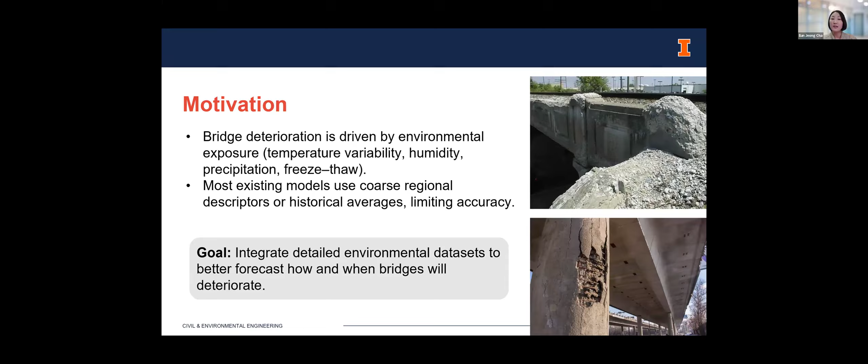So, quick overview of today's talk. We streamlined this according to our modeling process as well.

So we started with the data. I'm going to go over what data we have used and what kind of processing of the data we have done, and the initial model that we have developed, and some challenges we have and how we actually tackle them, and also the model performance of this initial model.

And then we also have improved this model. We are going to talk about the model improvement, about the data expansion, and the variable selection techniques that we have used.

And this improved model's performance. I'm going to also show you a brief demonstration of the model application in terms of predicting the bridge condition with variable environmental scenarios.

And lastly, I'm going to show you a little bit of a comparison between the precast versus the CIP bridges, CIP concrete bridges performance.

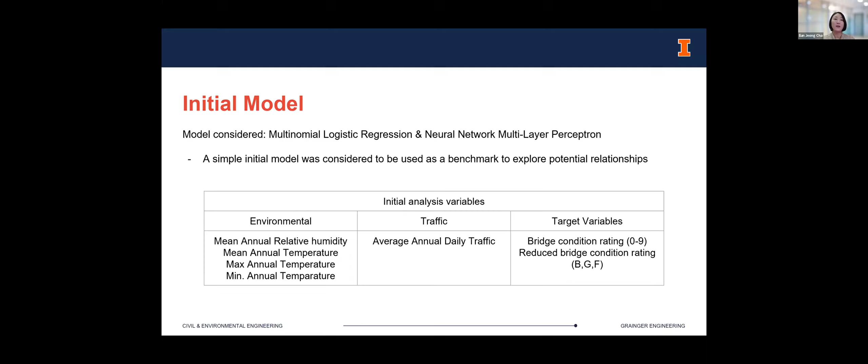So for the multinomial logistic regression, it calculates the probability of a bridge belonging to a specific condition class. We use two different classes. First one is good, fair, poor, just a 3-class system. And the second one is the structural evaluation classes, that 9-class thing from 0 to 9.

So those two are separately used, which we have just to generate a separated model for each individual of them. So with utilizing multinomial logistic regression, what we can get is a probability that the bridge specifically belongs to a certain class.

With utilizing x's as the parameters. Those are all the predictors that we use, which are coming from structural parameter, traffic parameter, and environmental parameters.

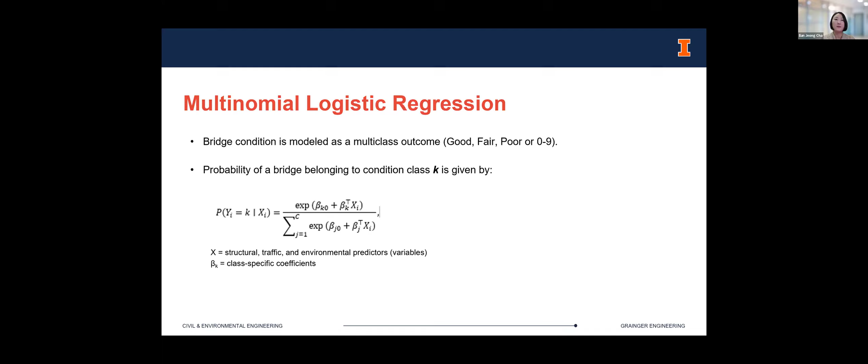So while we are modeling, this modeling is something like design. It's not just done in one step. We generate the model, and then we test the performance and accuracy of this model. There are lots of issues that we have found.

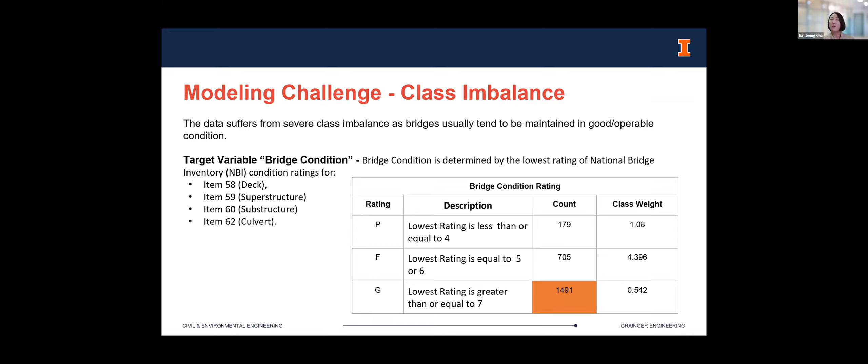The one main cause of the issue we found is class imbalance in the data set. As we can expect, there are not that many low rating, poor performance bridges out there. In the table for bridge condition rating - poor, fair, good - the majority of bridges belong to the good rating, and we don't have much representation for the poor rating. So there is definitely data imbalance, and that causes some issues in terms of performance of the modeling.

To address this class imbalance, we considered different techniques. First is oversampling of minority classes based upon our data - when training our model, we oversample minority classes. The second methodology is undersampling of majority class; they work together, randomly reducing majority class samples to prevent model bias. The third methodology we considered is assigning class weights.

In this methodology, we penalize misclassification of minority classes more heavily during training. In our case, when we evaluated assigning class weights, it actually worked the best to improve the performance of our model.

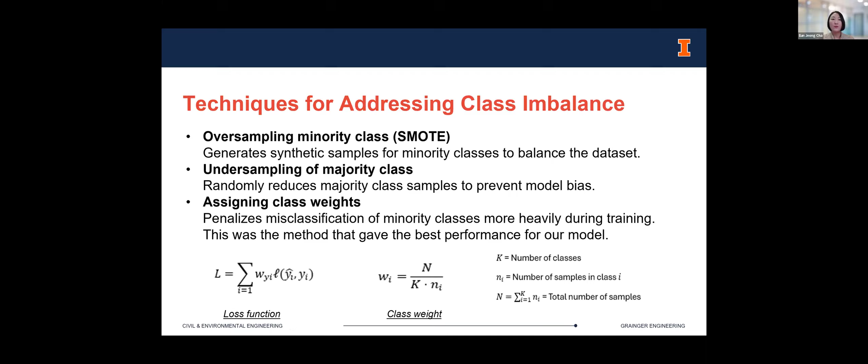Using this technique, we chose this class weight for training our initial model, using a 7:3 training to testing data split. Using both logistic regression and neural network methodologies, we got pretty similar results. For the 3-class rating - good, fair, poor - we got accuracy around 55%. Using the 9-class rating, we got accuracy around 37%.

Obviously we are not happy with this result, so we had to find additional techniques to improve the performance of the model.

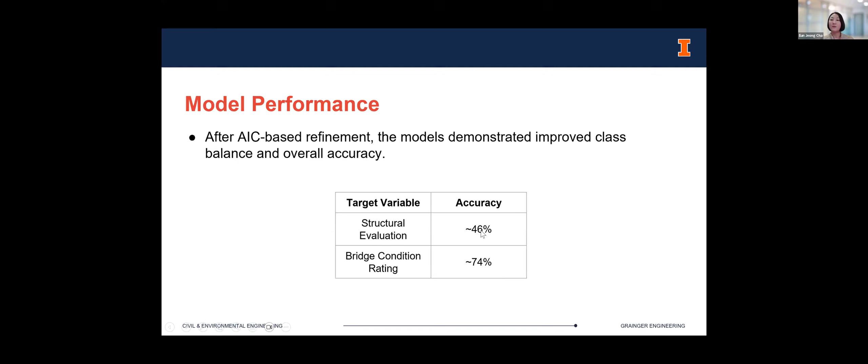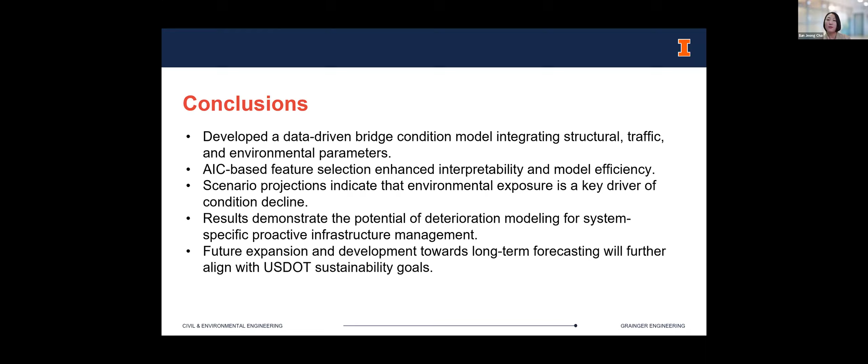And then all these bridge condition models can be used for future expansion and development toward long-term forecasting, the long-term management of those infrastructure systems. So that's all I have today. And if you have any questions, please ask now or send me an email.

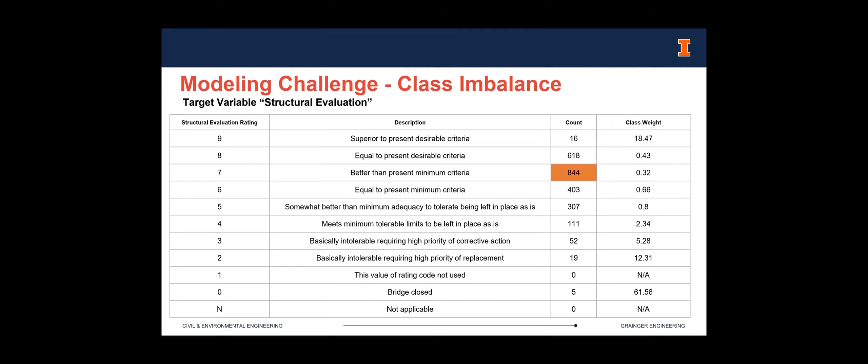Yeah, so you said the 5 variables were extended to 37 when you did the dataset expansion, and then when you applied AIC, those 37 variables were reduced to 10, and then it increased your accuracy. So is it possible, how did you break this down? How did you expand this dataset to 37? Did you break down the primary variables into 37 categories, or are those new variables that you inserted? Right, so yeah, good, thank you so much.

So for the 37 variables, we expanded from what we had earlier, and we performed a more in-depth literature review to come up with anything that could really be related to the bridge condition. So whatever had been named at least one time in any literature, we included it. Obviously, the names of those parameters from the dataset may not match the ones from existing literature. We just did a wide search, expanded it first, and obviously if you use too many variables, it doesn't always help train the model. So that's why we needed to identify only the key variables, and whenever there was a redundant variable, we let go of it. That's how the AIC works. But in the earlier part, we just tried to identify everything we could find from the literature review.

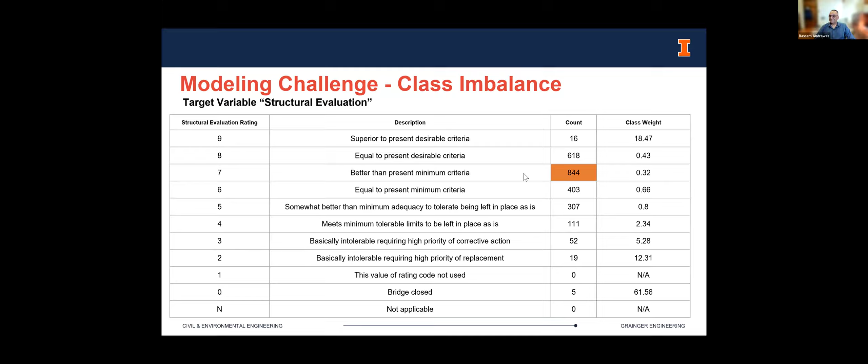Okay, thank you so much. Last chance for any questions, Dr. Cha? All right, well, thank you so much. Thank you, Dr. Cha. Thank you.

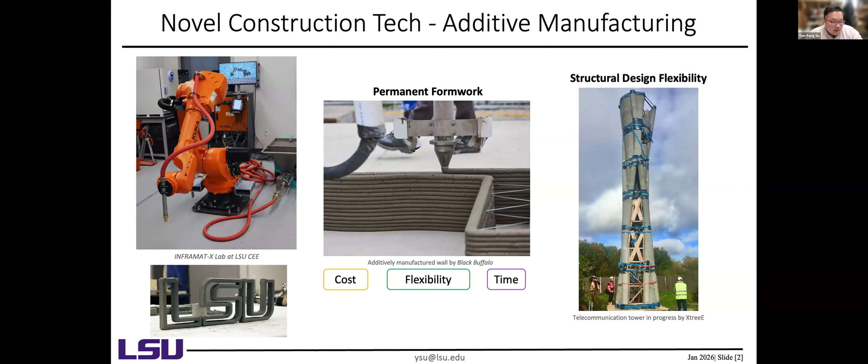Yes, thank you very much for the invitation. Today I want to talk about the work done with my student Kailula Touch on 3D printed smart permanent concrete formwork for precast structure members and components. As we all know, 3D printing nowadays is a novel and promising technology because it can reduce cost, enable a lot of flexibility in design, and might be able to reduce time.

We came up with the idea that one of the most promising fields for 3D printing might be using multi-material approaches to build multi-material structures. Previously this was mostly for polymers, and we thought, why not move to concrete structures or precast concrete structures to enable multifunctionality. Within this multifunctionality, one thing that really caught our eyes is the ability to sense or monitor the structure's own condition.

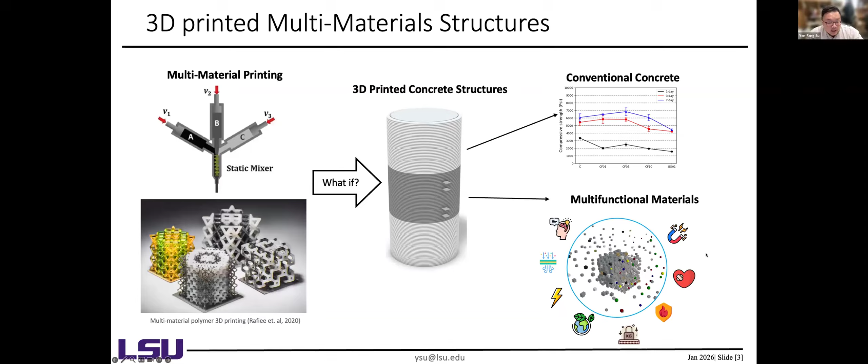The reason we're really into that is because current transportation infrastructure is not in good shape, and if we want to build new infrastructure or do repairs, it's better to embed structural health monitoring functionality. Traditionally, for structural health monitoring, we introduce a lot of different varieties of sensors.

However, the cost is not cheap, especially from the sensors themselves, different sensors, and the maintenance is not cheap either. So we wondered, why not find a material that has intrinsic sensing property or performance built in.

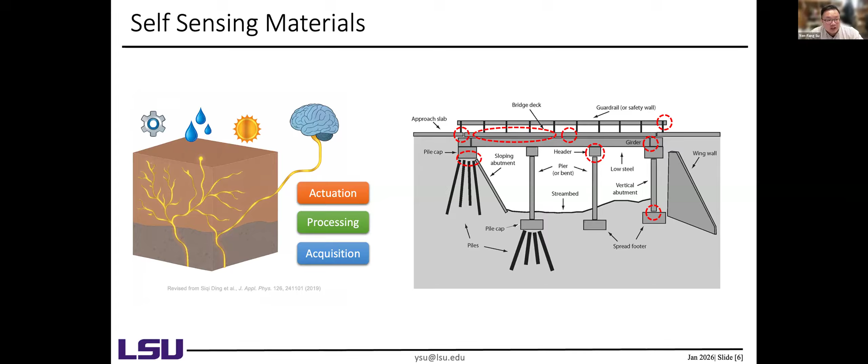That led us to study self-sensing cementitious material, or smart material. This smart concrete was proposed by Professor Chung, who is also in our center, from SUNY Buffalo, a few decades ago. We really appreciate her proposing this idea, and we got into this material trying to understand if it can really be implemented in civil infrastructure at large scale, because this material can sense stress, humidity, or different changes in the internal structure. Since this material is not cheap, we're targeting embedding it in specific or critical areas of the structure.

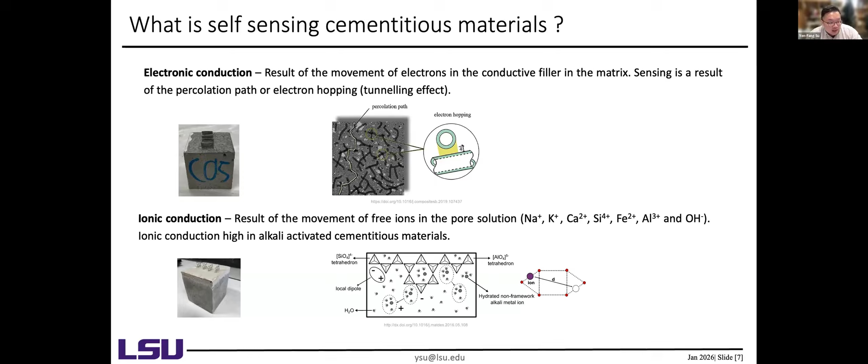Let me give a brief introduction to self-sensing cementitious material. Self-sensing basically works through two mechanisms: electronic conduction and ionic conduction. Electronic conduction is achieved by incorporating conductive filler into the cement matrix, from which we can obtain an electronic signal. Ionic conduction is based on the movement of free ions in the pore solution, intrinsically built into the cementitious material, specifically abundant in alkali activated material.

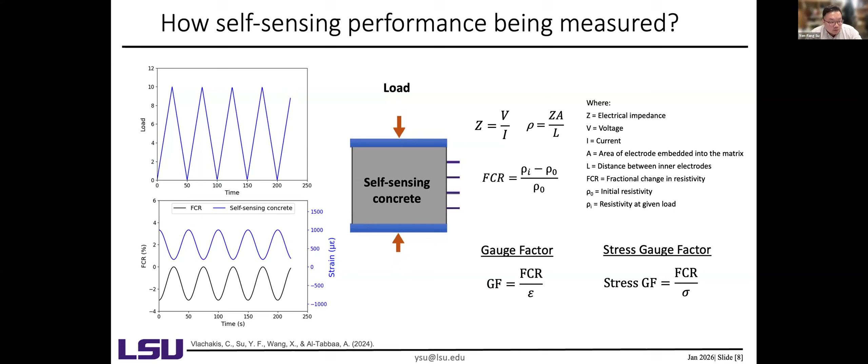So how can self-sensing performance be measured? Here's an animation we produced showing what happens if we apply a load to the material. We can measure the electrical signal by sending current through the material and obtaining the impedance or electrical signal, then convert that to the fractional change in resistivity. We further use this to calculate the strain gauge factor to compare with the strength or deflection. So it's basically like a strain gauge, but built into the material itself.

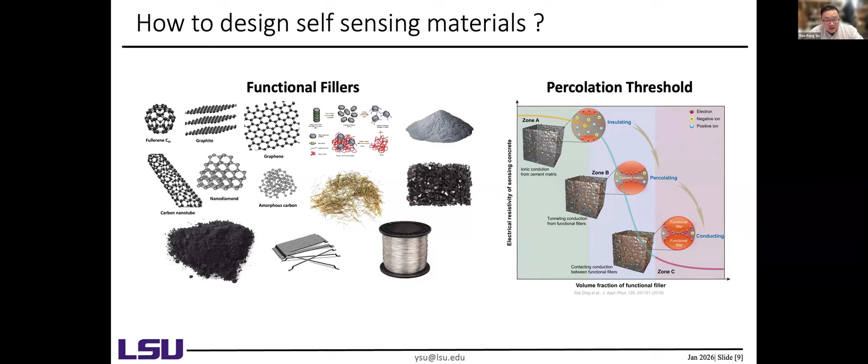But how do we design the self-sensing material? This material has already been developed, proposed and investigated for a few decades, but it's all been at small scale. So we wonder about the large scale. It's really critical to select the functional or conductive filler, and especially when selecting it, one thing we need to take care of is the percolation threshold - we cannot make the material too conductive, nor can we make it too insulating. We need to find a point in between.

So we conducted a really comprehensive literature review of around 100 journal papers from 2000 to 2024, collecting data to plot gauge factor versus strength. We classified these into concrete, pastes, mortar, and UHPC. We can see that some results, especially for concrete, mortar, and pastes, present really high gauge factors.

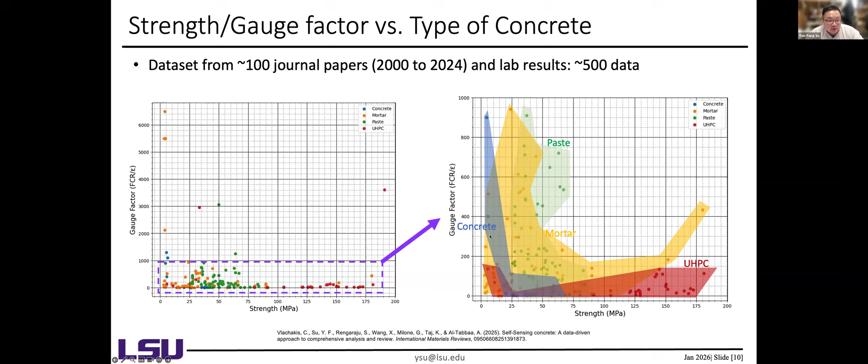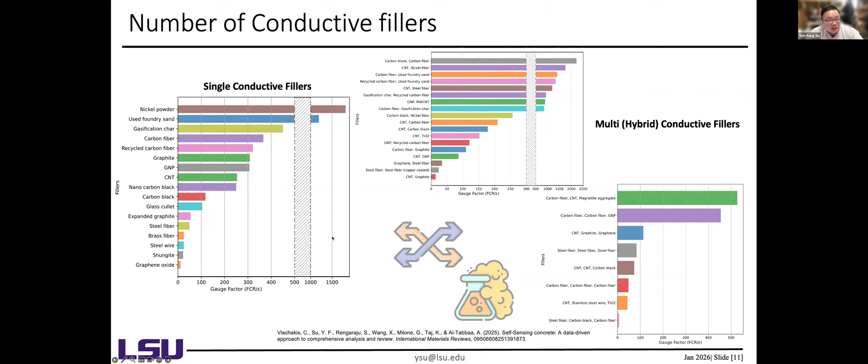In terms of conductive filler, we also noticed that people don't only use a single type - some use a hybrid of different conductive fillers together, and some of them get extremely high gauge factors. So we're trying to figure out what type of conductive filler we're going to use.

We also organized this data and found that conductive fillers can be classified into 0D, which is powder form, 1D which is fiber form, and 2D which is like a plate. We found that 1D and 2D seem to be better compared with 0D. So we collected materials for 0D, 1D, and 2D and tried to make the self-sensing concrete to see what results we could obtain.

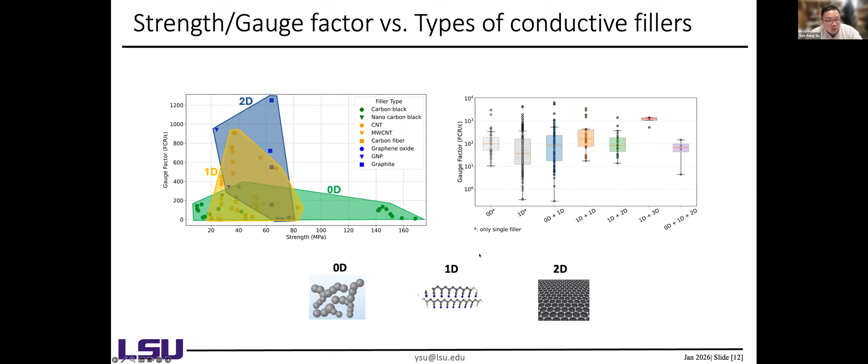So for 0D, 1D, 2D, we started from carbon-based materials. Carbon black is a 0D material in powder form, milled carbon fiber is a 1D material, and for the 2D material we got pristine graphene. We collaborated with different companies to source this material. This table shows the properties of different conductive fillers, including shape, density, and resistivity - the differences are large.

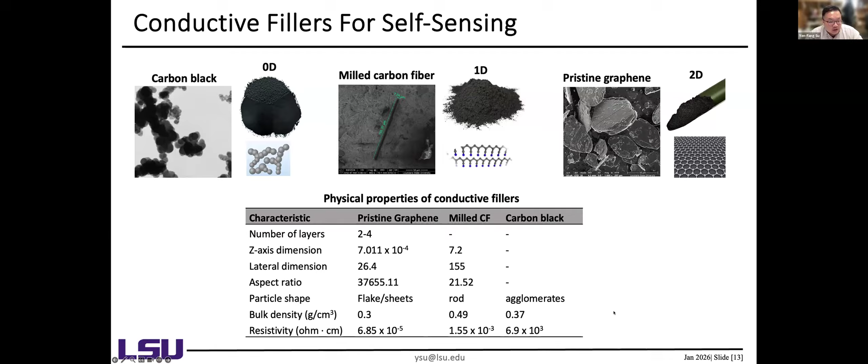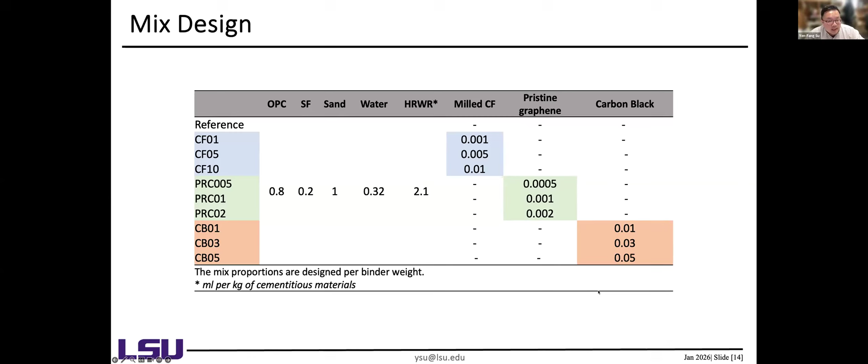So then we first came up with the mix design. We used ordinary Portland cement, silica fume, sand and water to make the mortar because we wanted to target 3D printing and pilot testing first. We added the milled carbon fiber, the pristine graphene, and the carbon black, trying to see which is better in terms of different properties.

So we started with the first stage: measuring the rheological properties, including flow diameter, setting time, shear stress, and viscosity, because that's important for 3D printing. We also tested mechanical properties, including compressive strength and interlayer bonding strength - compressive strength is important for infrastructure, and interlayer bonding strength matters because we're thinking about it being the permanent formwork. So we'll have the formwork, then cast the concrete. This bonding is really important and essential to ensure the integrity of the structure.

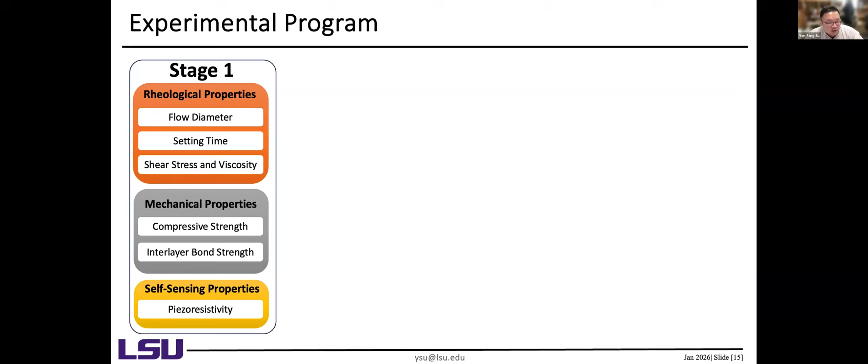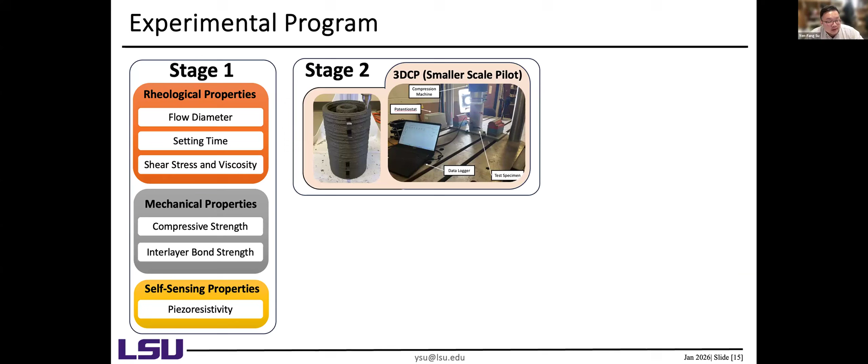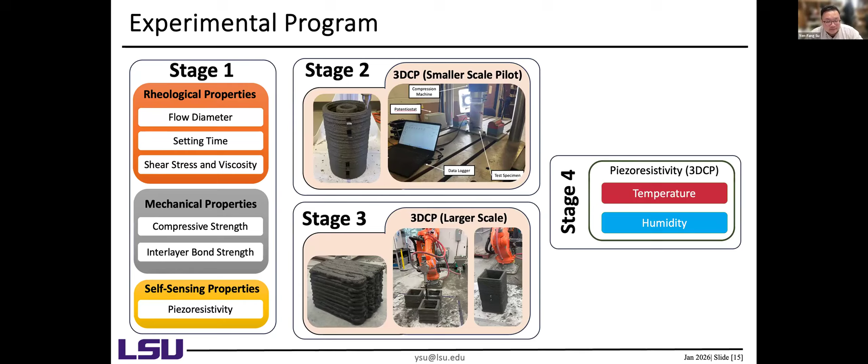Later we tested the self-sensing property for those materials. Next we moved to the second stage: testing 3D printed small-scale pilot samples, then used the robotic arm developed in our lab for large scale, and moved one step further to test environmental effects including temperature and humidity. So we first found the rheological properties of the self-sensing cementitious material.

For this flow table testing, the sample with carbon fiber showed pretty good, spreadable, workable flowability, as did the self-sensing cementitious material with pristine graphene. However, we noticed that carbon black actually absorbs a lot of water if we use the same water-to-binder ratio for all materials, so you need to adjust the water in order to achieve the desired flowability.

For the setting time, which is relevant to the opening time and also the printing stiffness development of the 3D printing, we found that carbon fiber and pristine graphene both behave great, having a longer setting time compared with carbon black. So for some mixes we designed with 5% or 3% carbon black, the setting time is actually pretty quick.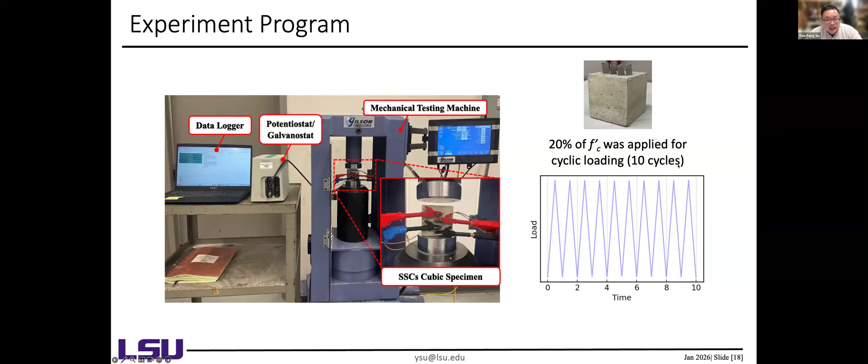We also wanted to measure the self-sensing property. This is the configuration of our setup, and we use the four-port method to avoid bad signal. We applied 20% of f'c to our sample, with cyclic loading for 10 cycles.

First we start from the 0D material, carbon black. For the control set, we got almost no signal for this FCR. If we incorporate a small amount of carbon black, we can see some signal, especially for 0.1% carbon black, where we see a really significant signal. And if we add up to 0.5%, we got a really noisy signal.

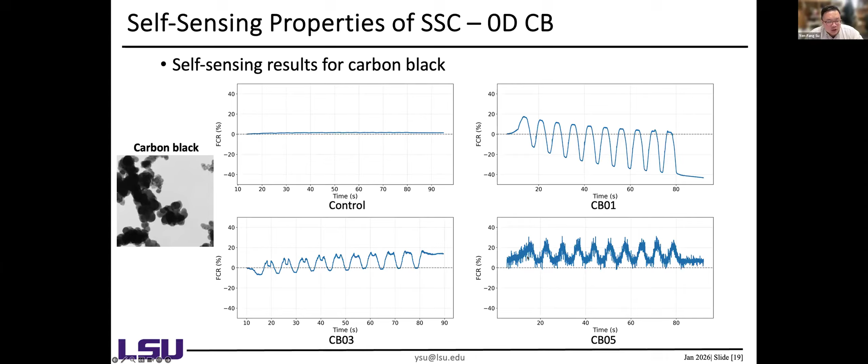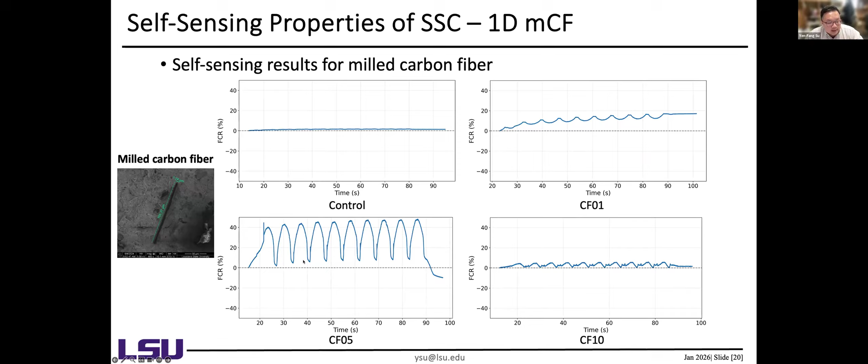Then we switch to the 1D milled carbon fiber. This material, in fact, performed better, especially for CF05 at 0.5%, giving us a more stable and obvious signal from this mix.

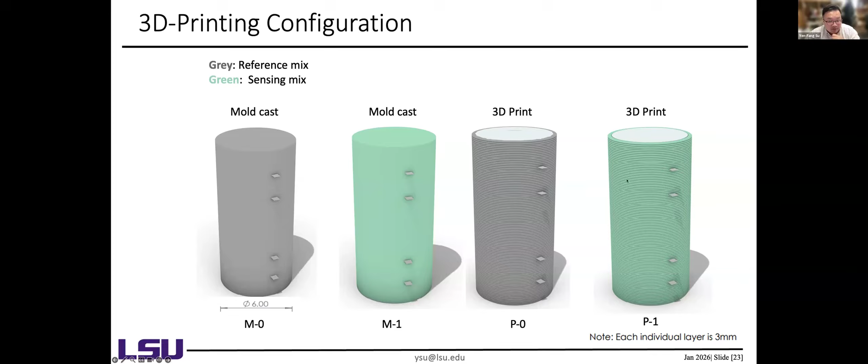For 3D printing, we first tried some small samples to figure out if it would work, with different printing configurations. We have the mold cast, which we compare with an all-reference mix - gray refers to the reference and green refers to the sensing mix. We also printed a shell and grouted it with concrete inside, trying to understand if we could see a good signal to compare.

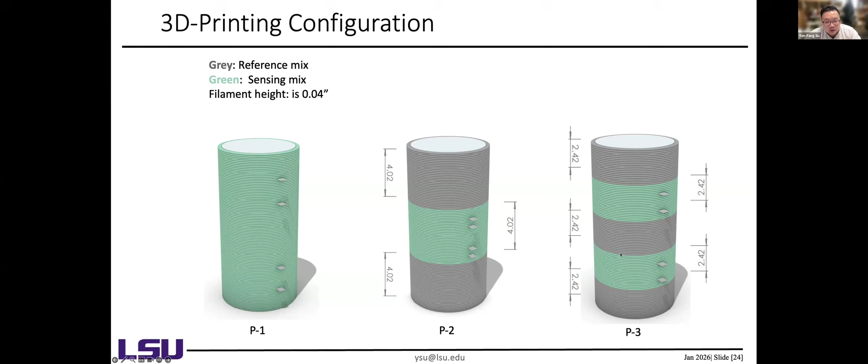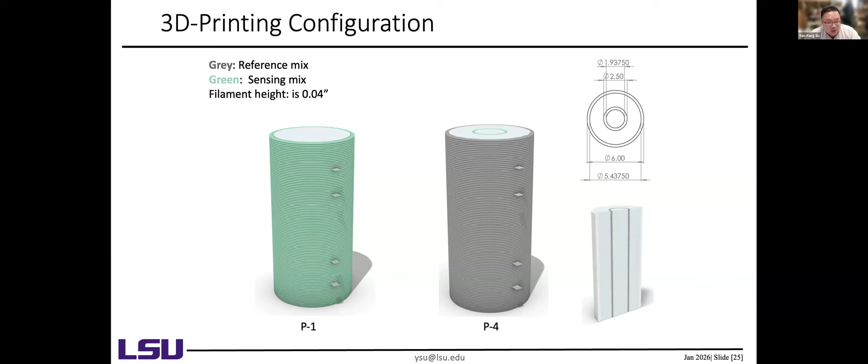We also tried different configurations, because as mentioned, this special material is not cheap compared with conventional concrete. We wanted to reduce the cost, so we designed different mechanisms, including putting only the sensing mix in the middle of the structure, and another set where we split it into two separate sections. Furthermore, we also wanted to investigate if printing just a small core inside a structure would work as well. This slide shows you the result.

Apparently, if we incorporate this self-sensing concrete, we can see the change of the signal along with the cyclic loading. And for the formwork, 3D print formwork, we can see a really good relationship between the cyclic loading and the signal, and the gauge factor is around 10.

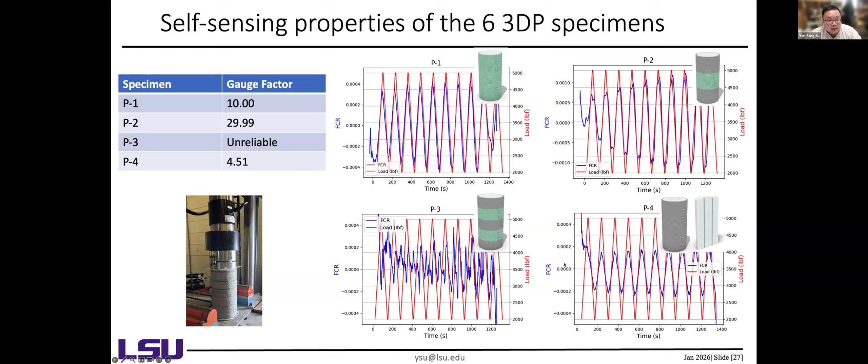We also found out that for P2, if we only incorporate this material in between, in the middle of the structure, we can also observe the signal, and in the middle as internal core we also obtain a good correlation. So in terms of reducing the cost, we determined to go for this configuration.

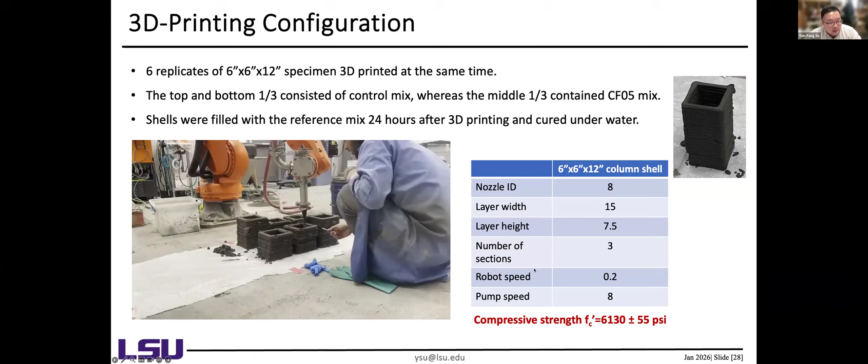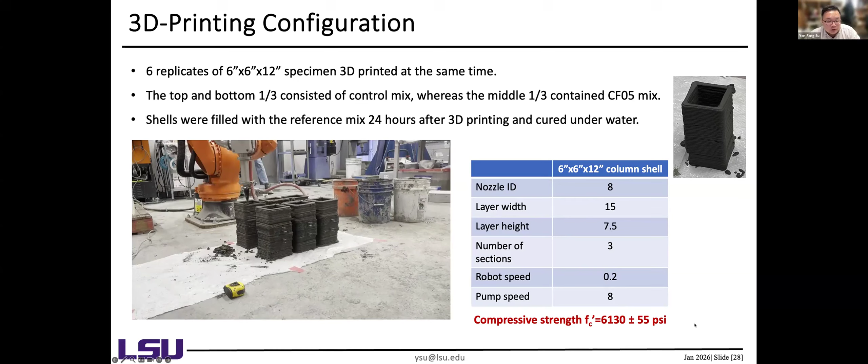So 1/3 of this entire structure, the top and bottom 1/3, are a regular control mix, and the middle 1/3 is the CF0.5 mix. We also tested its 28-day strength, and the strength is not bad, it's around 6 KSI.

So we then conducted this self-sensing evaluation with around 15% of the load rate, and we can successfully obtain this change to reflect the cyclic loading.

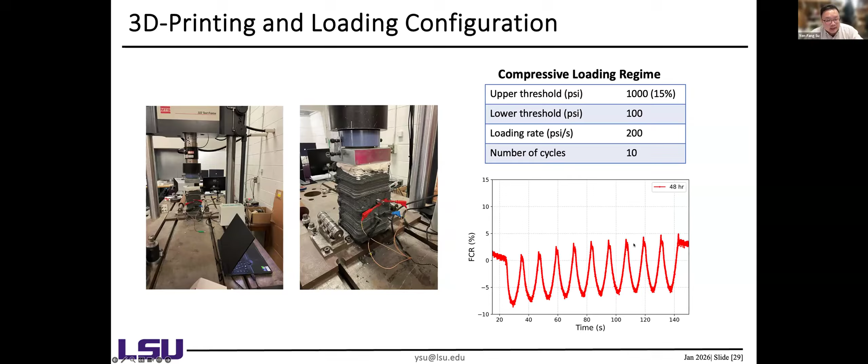And we want to move one step further to discuss the environmental effect. As previously Dr. Eun says, environmental conditions are really important to our infrastructure, so we firstly start from the different humidity level.

The thing is, once we cast the sample, then we submerge the sample all the way into water for 2 days, to make sure it's in the saturated surface dry condition, SSD condition. Then we also measure it and put it into the oven to create the different humidity conditions.

As you can see, it's time versus weight. So we put it into the oven at 60 degrees Celsius for 12 hours, 24 hours, up until 48 hours.

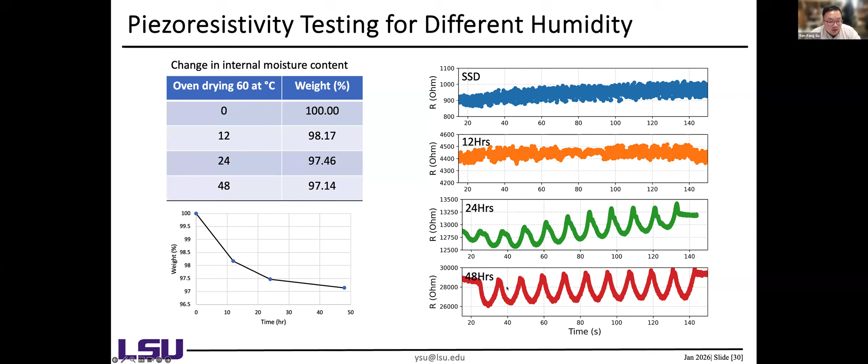As you can see, for the SSD, if you are fully submerged and the humidity is 100%, then you get a lot of noise which is really hard to interpret. If you only dry for 12 hours, still the signal is not obvious. But if you dry further to 24 hours, we can start to see the trend of the cyclic loading. And for 48 hours, we got a better signal.

So we further convert that from the previous slide, that is the resistivity, we further convert that to the FCR, and then calculate the stress sensitivity. So apparently 24 hours and 48 hours, specifically 48 hours, give us better sensitivity.

And for temperature, we tested 2 different temperatures for the pilot study: 22.5 degrees, which is the normal temperature, and 60 degrees. We observed that if we increase the temperature, the self-sensing performance actually decreases. Here it shows you the stress gauge sensitivity.

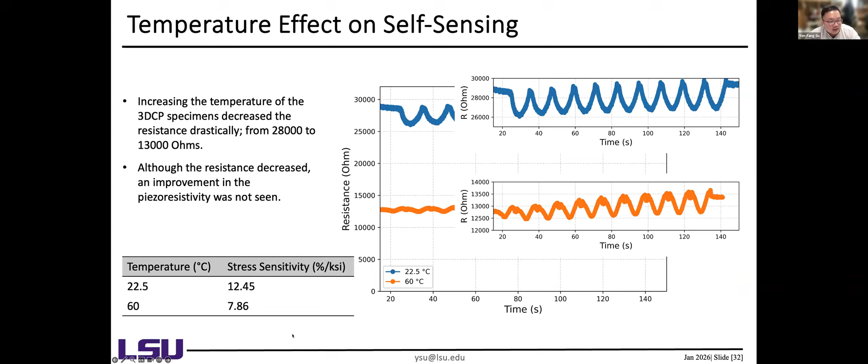So in conclusion, for this project we identified that the milled carbon fiber is a viable candidate to be used as a conductive filler, specifically for this 3D printing scenario. Its rheological property and mechanical property are really great, and also with high sensitivity.

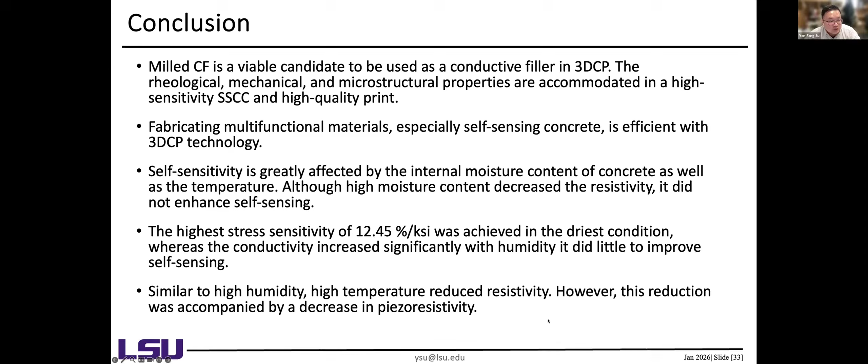So we successfully achieved this 3D print formwork, and we further tested different moisture content. The sensitivity we obtained is around 12% per KSI for the 48-hour dry condition, and for high temperature it will reduce the resistivity significantly. So that will be used for further investigation or study at the large scale.

So I want to acknowledge TRANS-IPIC for giving us the opportunity to work on this project, and also we work closely with the Louisiana Department of Transportation and Research Center on this. Thanks to the donor for the material, and that's thanks to our students.

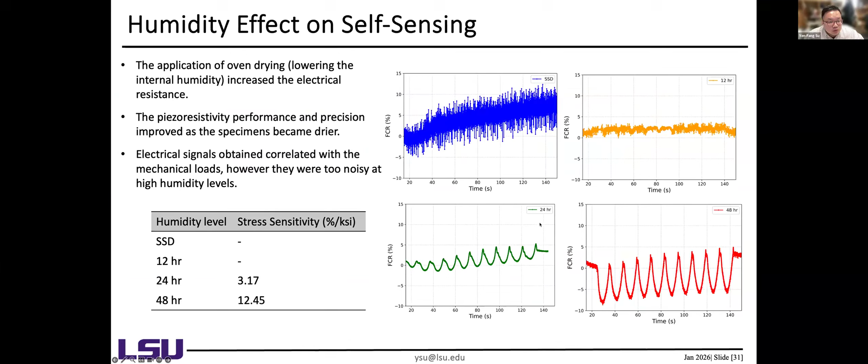Mold. So let's switch to, so if I understand correctly, you are asking about duplicating the molds you've done with 3D printing in a regular lab that doesn't have a 3D printer.

Yeah, I think that is repeatable. So if you can design the mold and then produce this formwork, I think that might work as well. But we haven't tried that. It's a really good comment suggestion, though. We might dig into that further.

Okay, I'm looking for scalability, where 3D printing is more for a lab sample size, but on a large scale it is not yet at the point where 3D printing can be used at that level. So a regular mixer would still be the common one to make concrete. So how could I produce what you propose today on a larger scale? That was the question, at the larger scale.

So at the larger scale, you mean mixing this type of material? Correct, at the larger scale. Yeah, I think if we want to mix this material at a larger scale, specifically for this carbon-based material like carbon fiber, we need to first distribute that into the water and make a solution, and then we can directly dump it into the ready-mix truck for the large-scale application. Right now we are still in the lab trial, but in the future we are planning to collaborate with a ready-mix company to try if we can dump the material directly into a ready-mix truck and make it large scale.

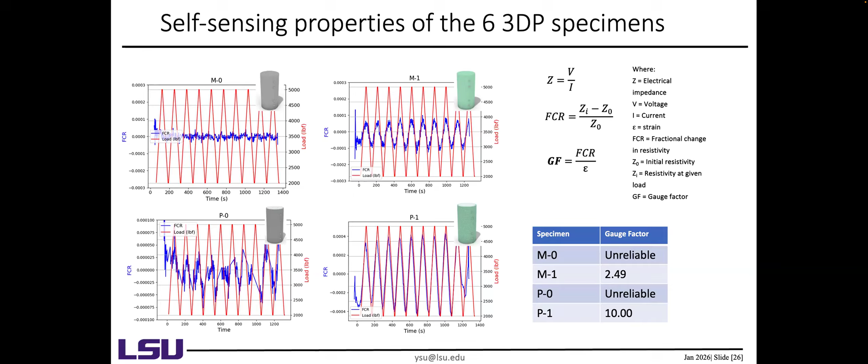Yeah, thank you for the question. So what we did is we cast the normal concrete first and cured it for 28 days or longer, and then we put the self-sensing concrete on top of that to test if we can get the bond strength. So it's the normal concrete with the self-sensing concrete. Oh, okay, Professor, thank you. Thank you, thank you.